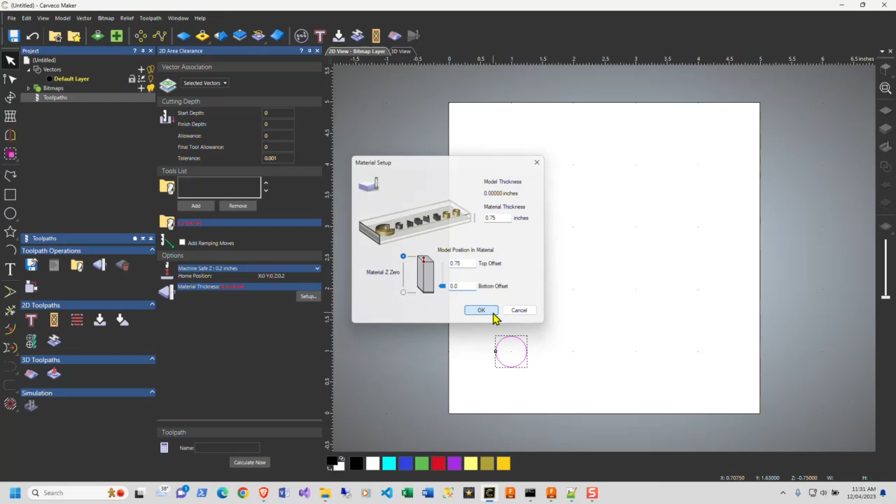Alright, so just keep that there. It'll tell you your thickness is 0.75. I think this should give us more information. There it is. So Z bottom is minus 0.75 and the Z top is 0, which seems to be a little backwards than this, but we'll go with it.

So when you Z off at the top of the material here, this is going to be X, Y, and Z 0. So keep that in mind: at this point right here at the top of the material is X0, Y0, and Z0. Forget about what all these numbers are above the cursor, but that's what it is, and that's what this is trying to tell you. All right, so let's go back to 2D view.

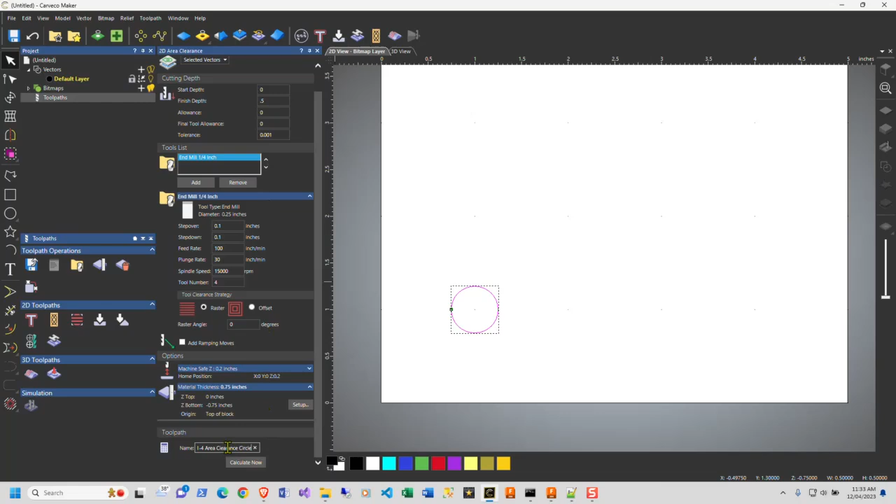So we're going to add a bit. The bit I'm using is a 1/4 inch. It's my tool number 4. If you need to set a tool number, you can go to Edit, hit Select, and we're only going to go down 0.5 inches, because I don't want to bore all the way through the thing. We're going to make this a 1/4 area clearance for my circle. And then you're going to see the toolpath get created.

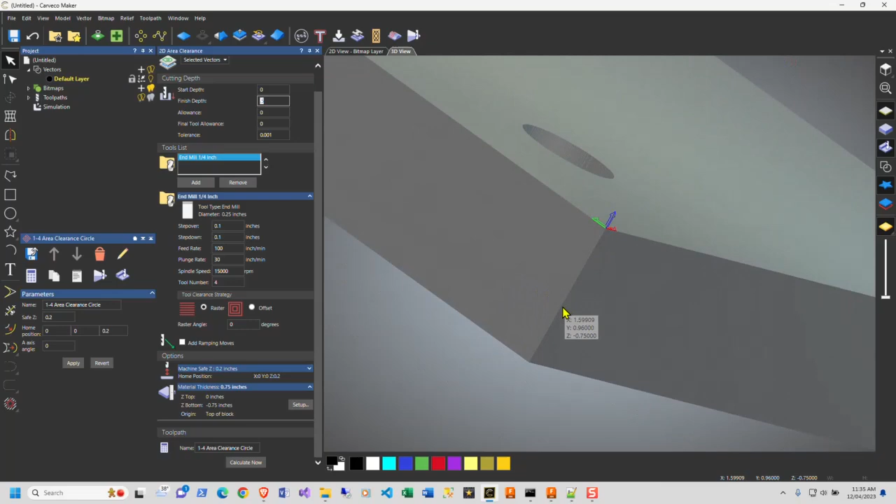Okay, so now you can see that we have a toolpath, and if we execute this, you will see that it is not completely through. We have a hole that is a 1/2 inch deep, and it does not go completely through because this is a 3/4 inch piece of material that I have here.

So what we're going to do is go out to the machine, and we're going to show you how to move this origin up to here and create another hole, or move the origin over here and create another hole over here. So you can do that on the machine without coming into here and actually moving the physical hole.

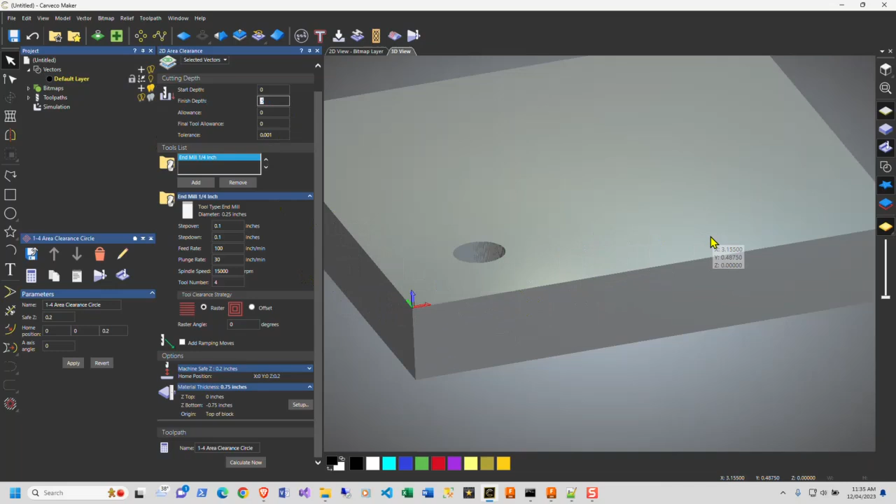This helps out a lot because a lot of times when these are created, you might have a bigger piece of stock, and you might want this hole to be closer to the edge of the stock. So moving this origin around will allow you to get your cut where you want it to be on that piece of material.

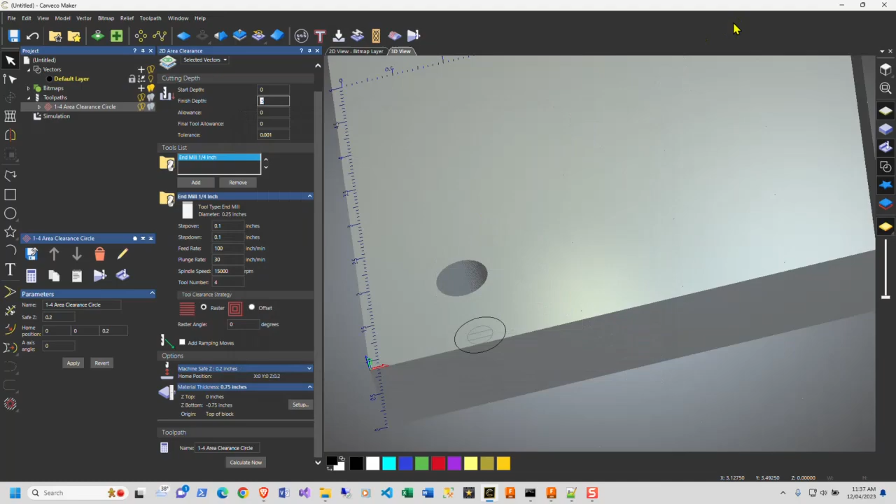So let's get this thing saved off now that we have it created. Area clearance, it's fine. And now it's saved. All right, so we can move out to the shop now and get this thing loaded up. So the G-code file is in this Lars Workshop Step 1 area clearance. It's what we just created. So it's going to get loaded, and as you can see, it looks like the bat signal here. It's just a circle out in the middle of the field.

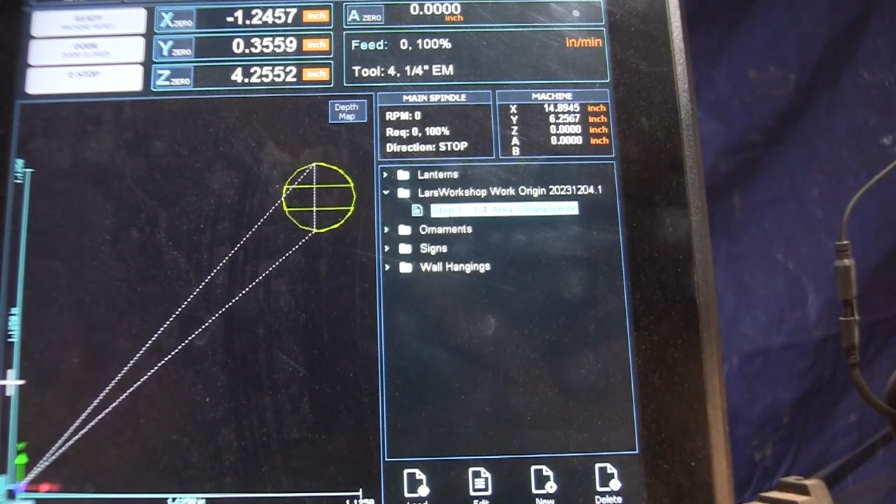So nothing major. If we pop over to jogging and probing, because we have to get this corner down here probed, which is 0, 0 for X and Y, and that is right there. So we're going to get this guy probed. We've got a whole video up on how to probe and I got another video on the errors you can get with probing and, well, Masso errors in general.

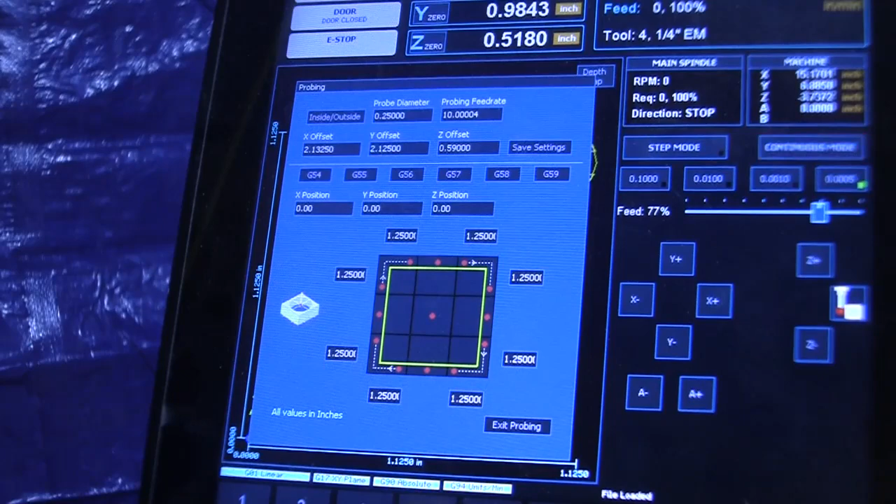Make sure you save your settings. You don't need to do this every single time. I'm just reminding you, you need to save settings before you actually do your probe if you change probe diameter. So if your bit changes.

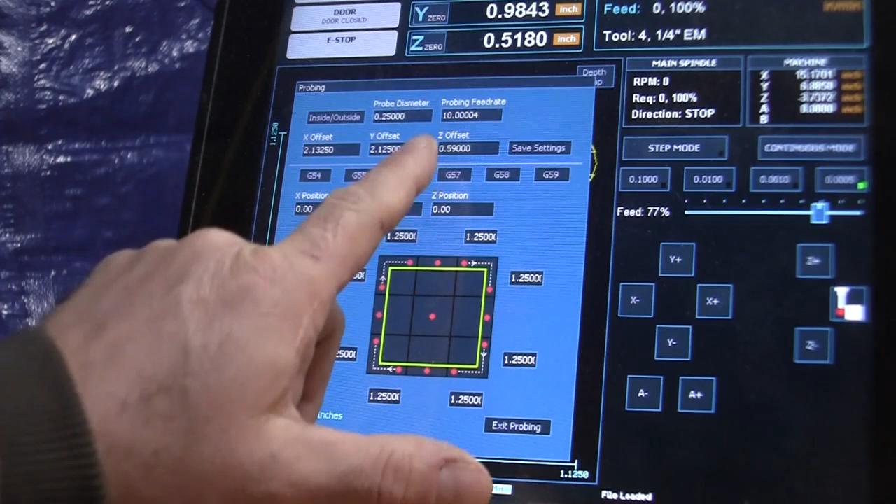So to do this probe, this is the actual probe block. We're going to touch this side, go over, and we're going to touch this side to pick up X and Y. And you'll see that happen right here. Just picked up X. And we picked up Y. I'm going to raise Z up.

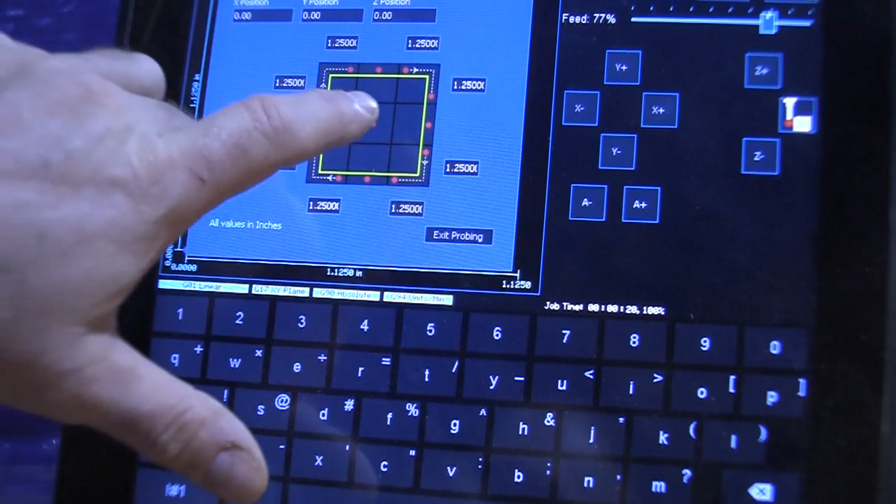Scoot that over top of the probe block. And then we hit the center button on here, that button right there, and this is what will happen. So you hit the center button, it lowers down, touches, the electrical current connects between this magnet and the block, and now we have our X, Y, and Z.

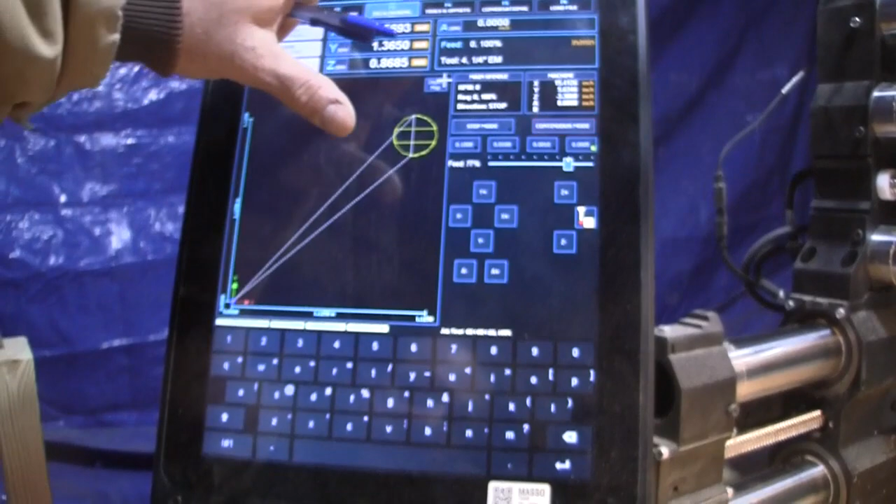We're going to go up to F4, Tools and Offsets, and then there is a G54. Now I've double clicked on this and named this Work Origin. Highly recommend you doing that, so when you come back here you know what you're looking at. This guy's Work Origin is 13.8 on the X, 4.26 on the Y, and negative 4.25 on the Z. That is what you just probed.

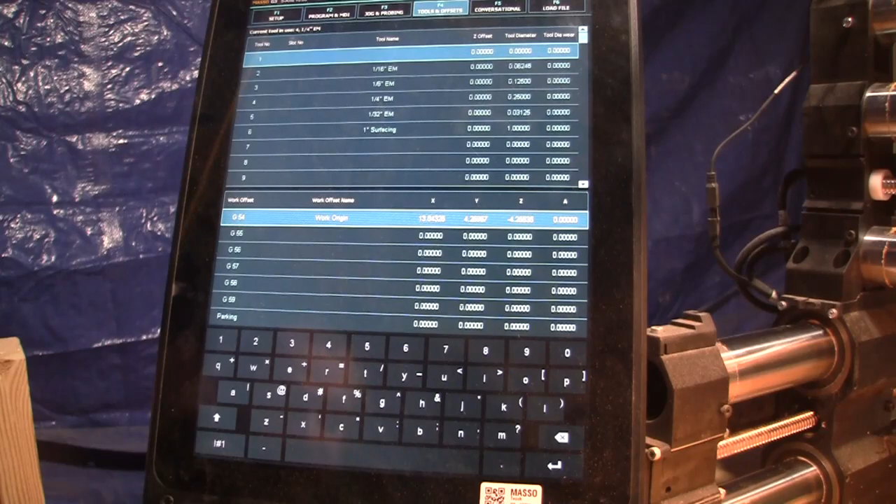So you just told the machine that my work origin is going to be residing at X at 13.8 from the machine's 0 and 4.26 on the Y from the machine's 0. Don't worry about the Z right now. We'll get into that later.

Okay, so if we go back to programming in MDI, you'll see the machine thinks it's at 15.4 and it's at 5.6. So let me zoom in on that so you guys can see this. This is where we're going to spend a lot of time in this video today. This area here is the machine's location. This area here is the job's location.

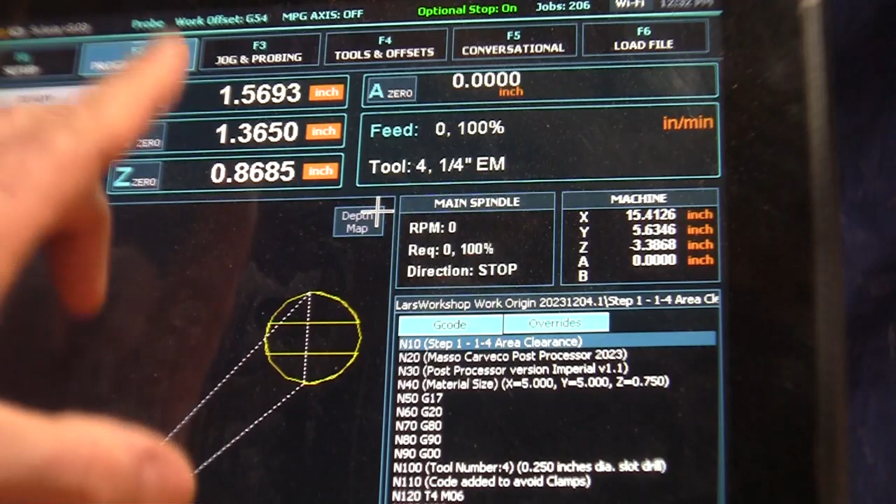In order to understand how this coordinate system for the machine and for your job works, because there's a relationship between them that everybody needs to understand to be able to do CNC programming and to be able to understand how to move a work origin offset, or deal with anything that's going on in your machine, there's 3 different points that we deal with.

This point here is the X and Y 0. This point here is the X and Y and Z 0, or the home of your machine. So when people are saying, hey, I had to home my machine because it didn't know where the point was, well, this is the reason. Because this is where your 0 is for your machine. 0, 0, 0 is right here, right where this tip is. All right.

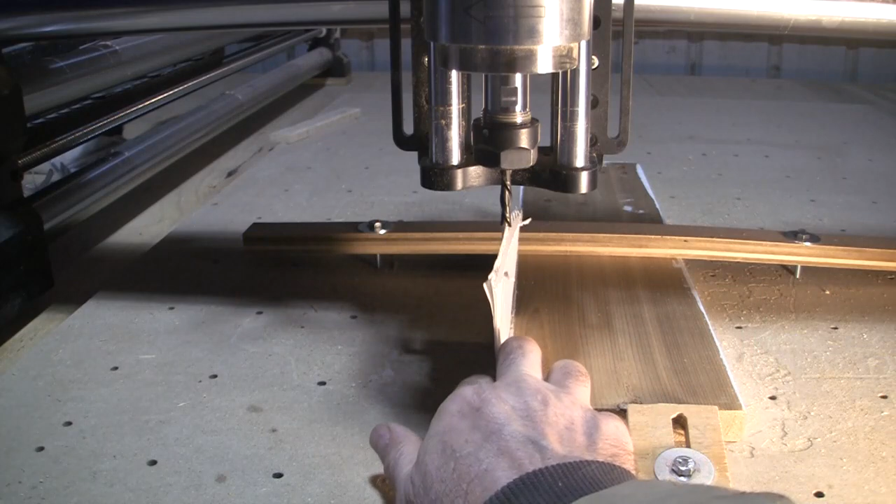Now the other point that we need to look at is the one that's over here, and it's the work origin for your job. Now this for your job is 0 on the X, 0 on the Y plane here. So if I take a piece of paper and I set this like this, and you take this plane all the way up, it's going to hit the center of the bit on this side. If I take this plane over here and bring it up, it's going to hit the center of the bit. So for X and Y, this bit is in the planes of X and Y.

All right. Now it's still in the plane for Z for the machine, because the plane for Z for your job is the top of this piece of wood. Now, in order for us to see this, let me bring this down. Now that bit is sitting on that top left corner of this piece of wood, right? Because that is the 0, 0, 0 for the job.

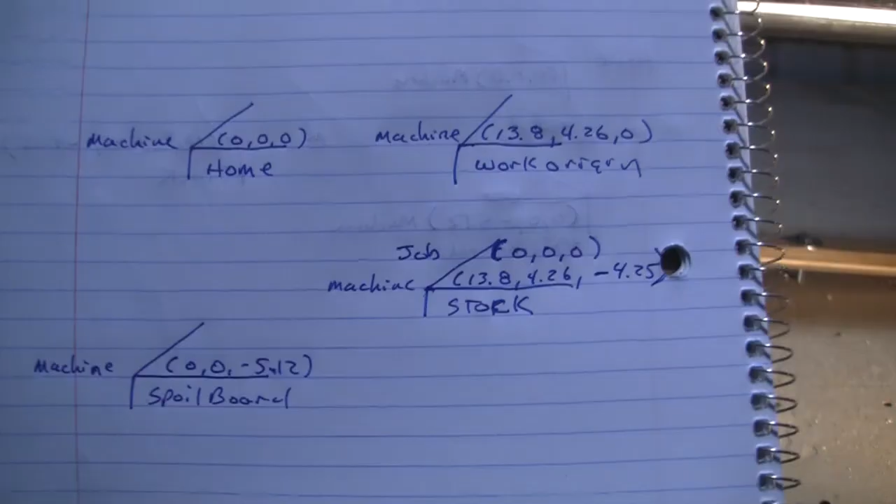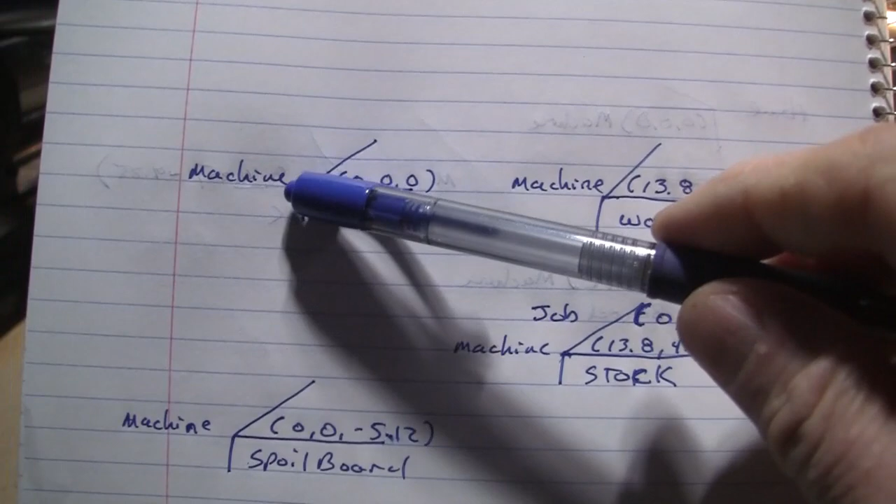So let's step back a second and think about this. Okay, so if we start from homing the machine, your machine's coordinates are going to be 0, 0, 0. All right. If you were to drop this bit down onto the spoil board on my machine, the coordinates would be 0, 0, negative 5.12, because the Z came down 5.12 inches.

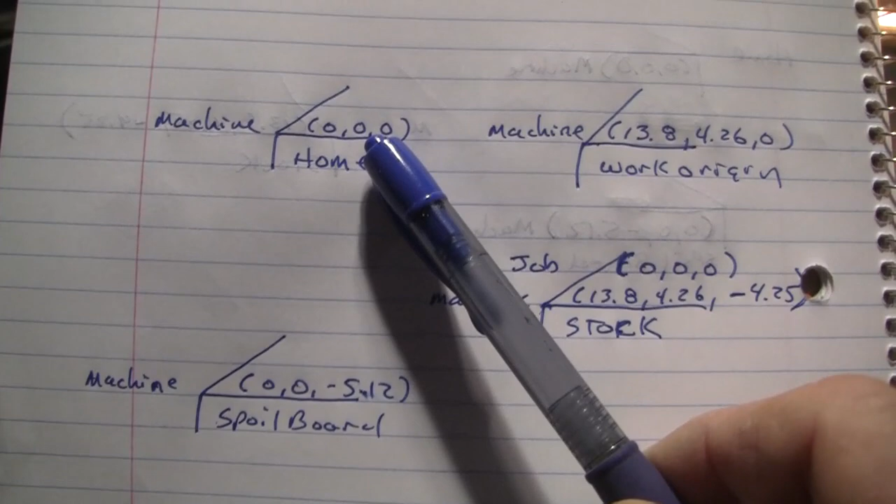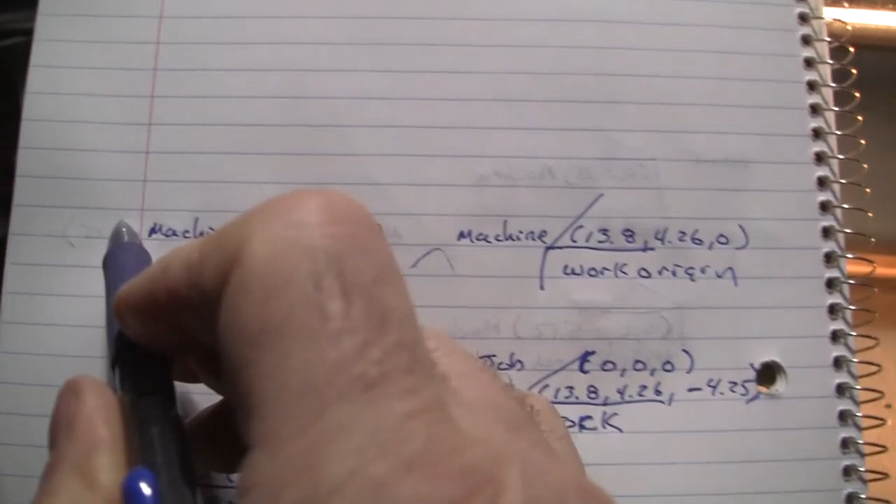So we go back up to the home, and if we were to hit work origin, it would zip over to this location, and it would be 13.8, 4.26, and 0 for the Z, because you're in the Z plane up here. This is the Z0 plane.

All right. Now, if we were to bring this down to the top of the stock, right, that top left corner where it's sitting right now, that location would be 13.8, 4.26, and negative 4.25, because we just came down from the Z level here.

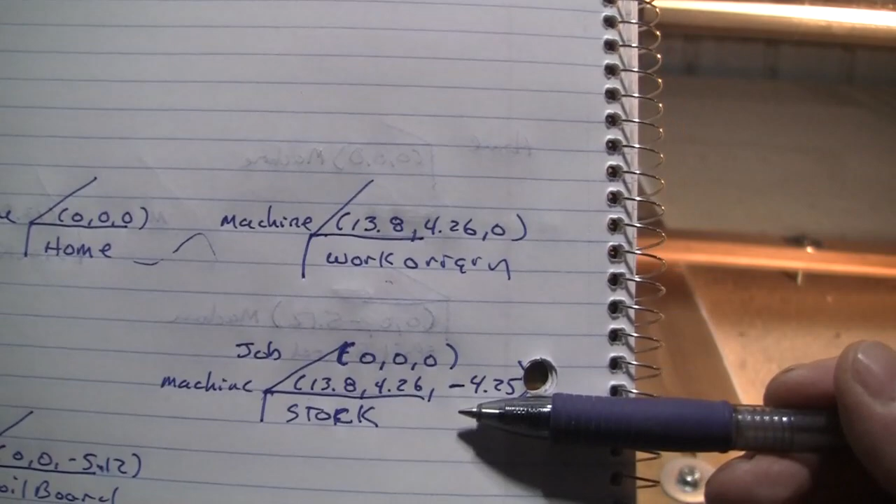But as far as the job's concerned, and this is what we're concerned about, it is 0, 0, 0 because this front piece of the wood is the X plane, its 0 is there, the Z 0 point is there, and the Y 0 point is there. So if you look at the pen, the tip of the pen, that's the center of the bit lined up. There's a gap in between here because that's the outside edge of the bit. Alright, so here's the outside edge of the bit.

You can see the gap. But the center of the bit, if I bring this up, you slide that under, you can see the center of the bit is lined up with that line on that 2x4. Okay, that bit of 2x4. Now if I pull this out, that's how far it is. So the center of the bit is actually on that little tip, that little point of that stock.

And it's the same thing going the other direction. If I was to go this way, you would see the same thing. So both the Y and the X is on that little tip. But we can change all this, alright? Now, the reason I'm setting this up is I want you to realize that this is the work origin for the project you're working on, not for the whole machine.

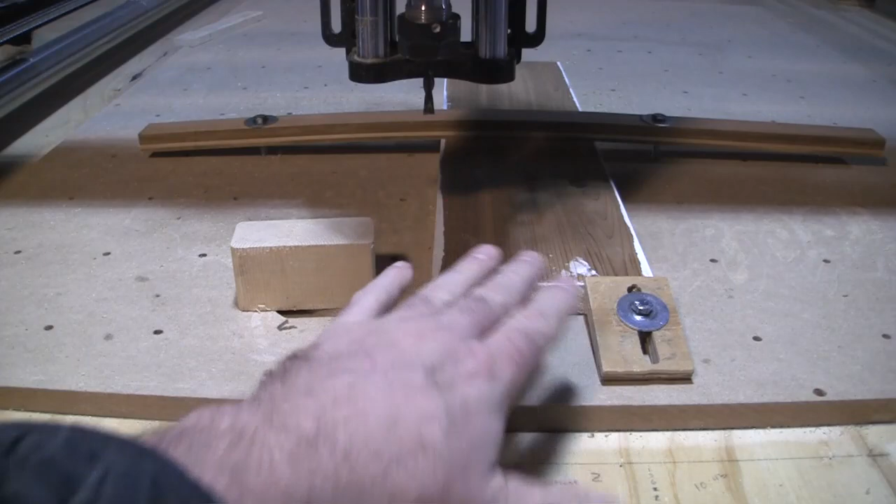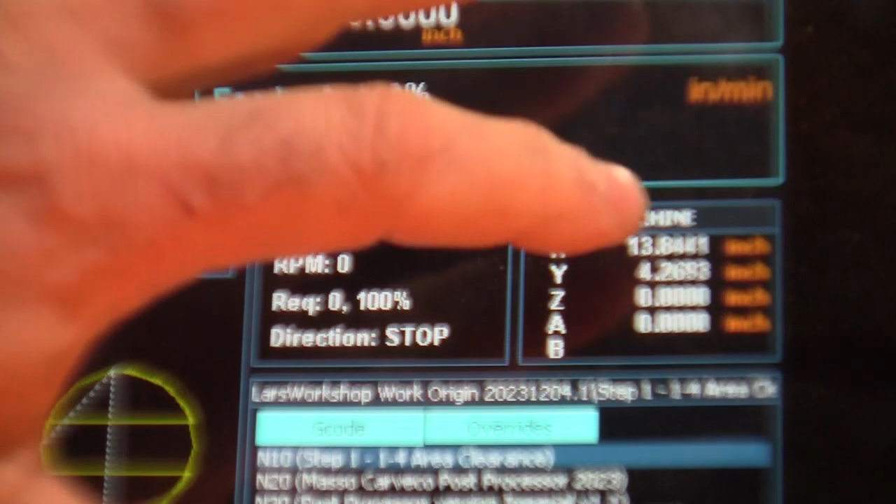So here on the screen in the machine area, these are machine coordinates, you can see that the work origin is X is at 13.8, Y is at 4.26, and Z is at 0 relative to the machine being homed. Alright, so a little recap on this.

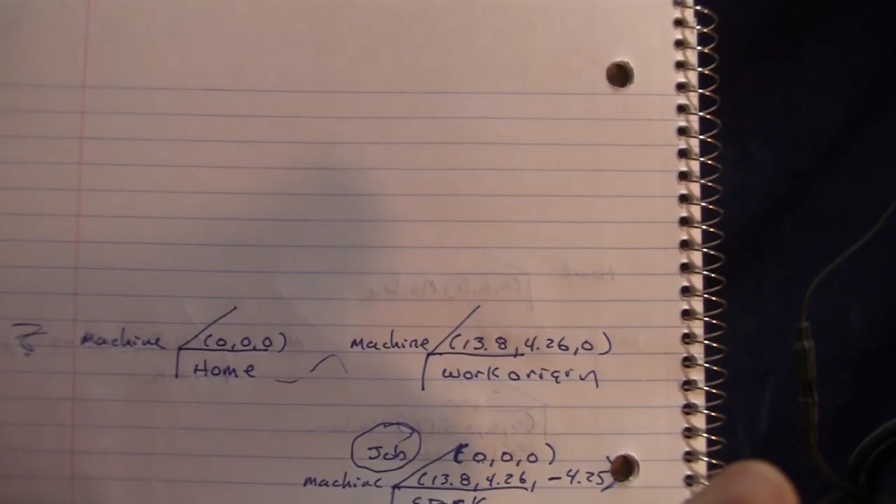So if your home is 0, 0, 0, that's up in the air in the front left hand corner of my machine, the machine for the work origin says 13.8 is the X, so we went 13.8 inches to the right, 4.26 to the back, and we haven't gone anywhere with the Z. Alright? And we can tell that by looking over here at the job.

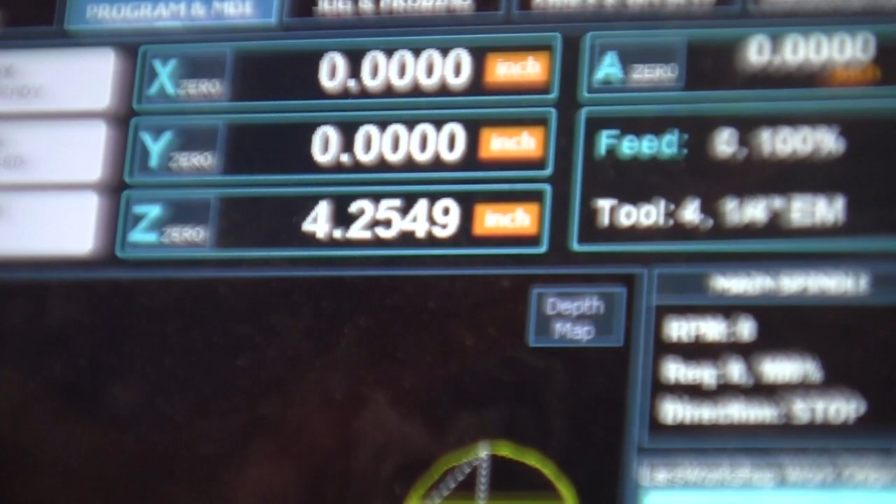So remember, X, Y, and Z is for your job itself. So here's the job right here, on the top corner of the stock is 0, 0, 0. So we are 4.25 inches above the job's origin of 0, 0, 0. Alright? So at this point, let's kick this thing off. We're going to get it running and we're going to cut a hole. And that hole is going to be exactly 1 inch to the right and 1 inch back.

Okay, so as you can tell, there's a hole that's 1 inch up and 1 inch from the left. And what we want to do is, without reloading a new program, without going back in, we just want to move this hole up another inch. Alright, so we're going to move this work offset. So how do we do that?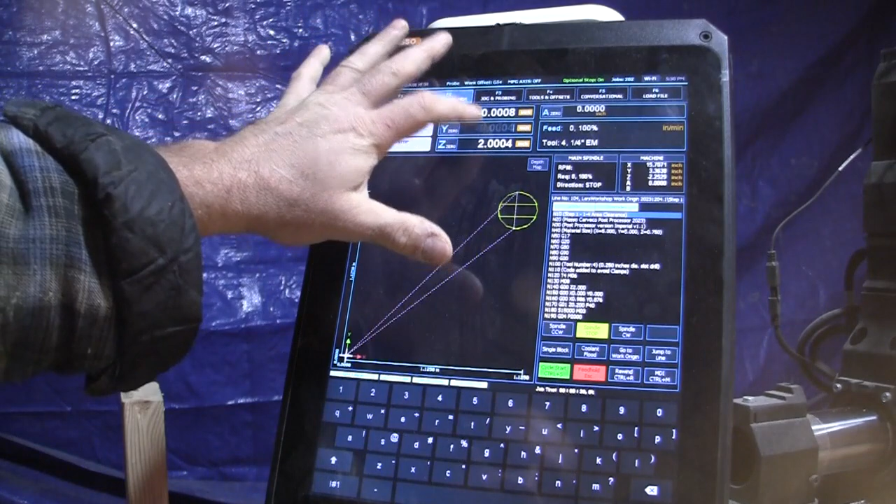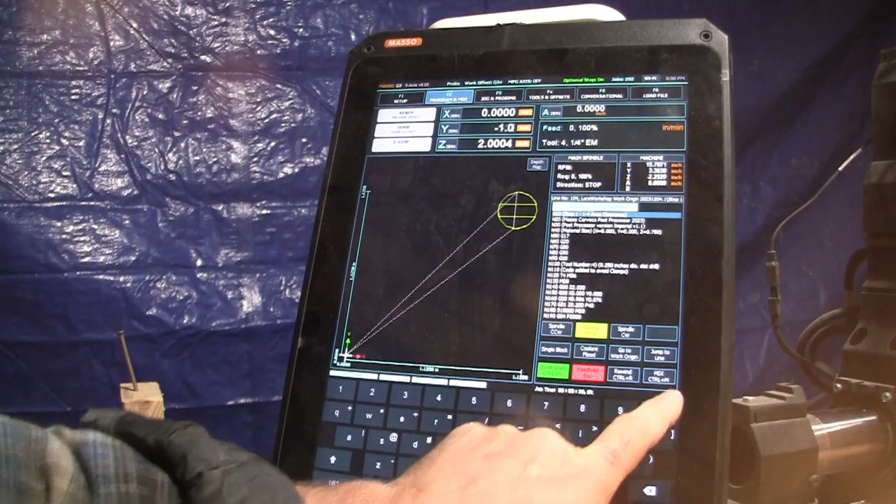If we go back to the console here, the Y, we're just going to zero this out. 0, 0 doesn't really matter. So if we take the 0 for the Y and we tell it that position is -1.0, we hit enter. Now watch what happens to the bit. I'm going to say go to work origin, and it just moved away from us.

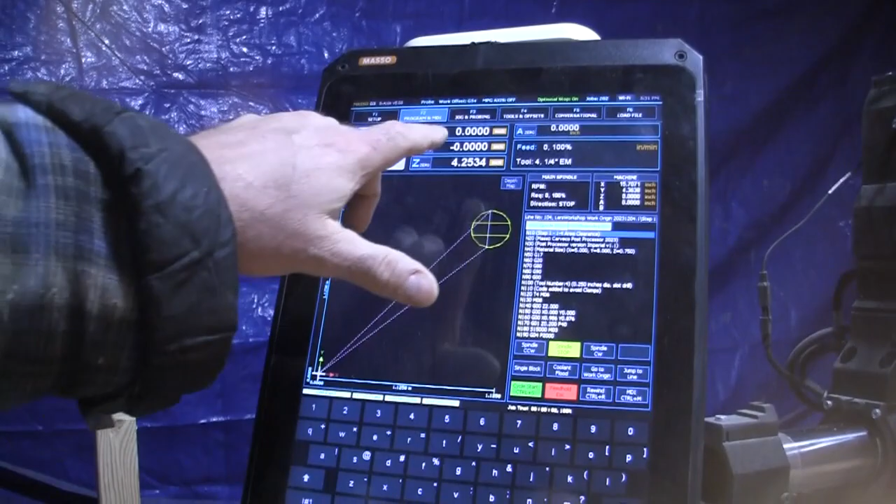Alright, I'm going to bring this down so you can see how far it moved. Okay, so we moved an inch back. So now this center is lined up with that. Let me do this again. Let me go back to work origin, because that's where it thinks work origin is, and as you can see, this guy thinks that we're at 0 up here. It says -0, but it still thinks we're at 0.

So let's say, nope, sorry, that was wrong. Let's make this 1.0 again. And now let's go to the work origin. So we're going to put it right back where it was. And you're going to see it's going to pull forward. All right? So that pulled forward. And now that says 0 up there.

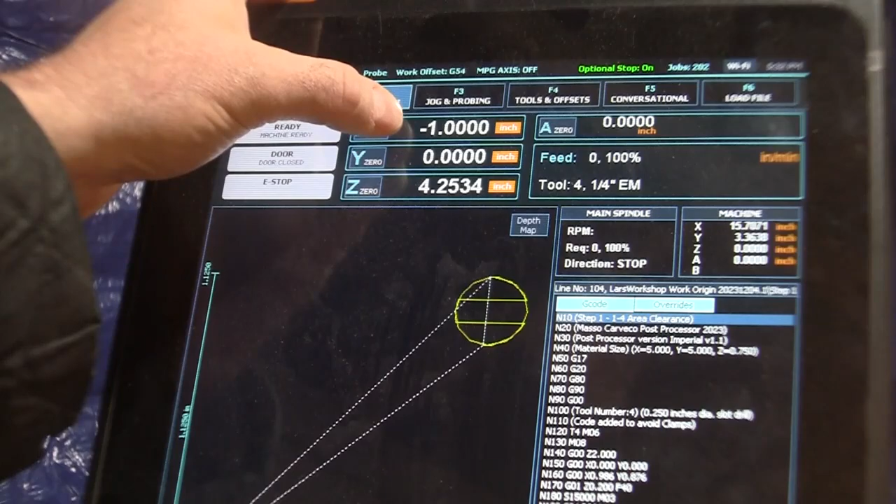So let's go to the right on the X. So let's take the X and say we are at -1.0. That's what we are telling the controller here, that the point that we're at is X is -1 and Y is 0. Let's just go with the 0 right now. Now I'm going to say go to work origin. Okay?

And it moved to the right. Now it's directly above that circle. Well, it's not directly above it. It's in front of it. It's right here, on this plane right here. The Y is on that plane. So if you wanted to get it right over the circle, you could put in here for the Y, say -1, hit enter, and then hit go to work origin, and watch what happens.

Now it moves back. If I go to jog and probing and bring this down, I'm going right in the center of that hole. All right, so that's what it takes to move the point around. So let's create another hole out there.

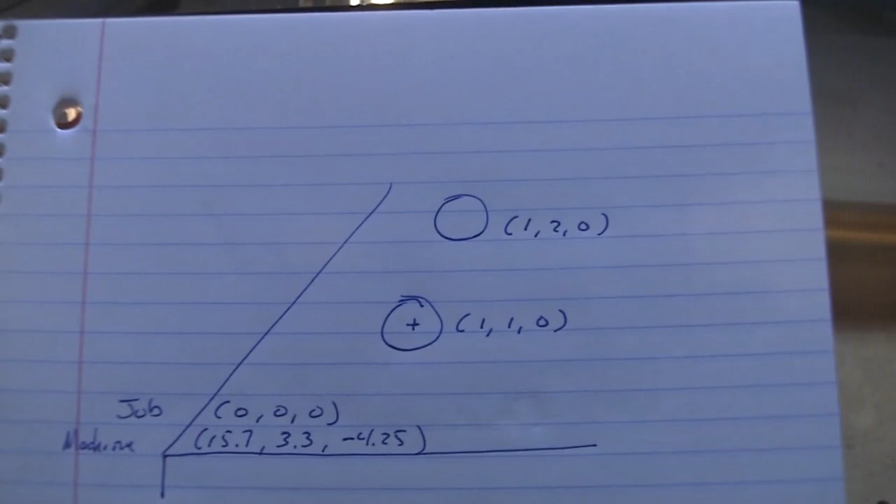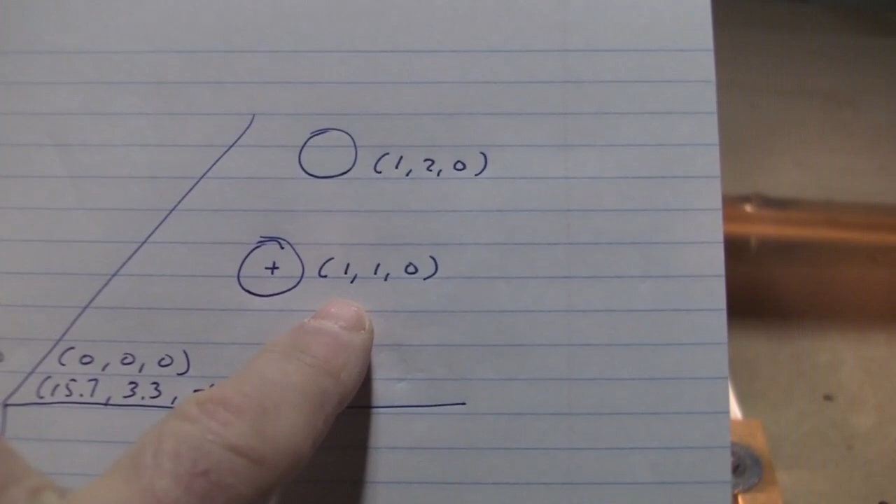In order for us to plan to move the offset, we need to know what we want to do. Say we just want to drill another hole back beyond here, 1 inch back. So that's what this is correlating to. We still have our offset currently sitting here for the job 0, 0, 0. This hole is at 1, 1, 0. So this hole we want to move back an inch, but still keep it in the same plane in the X frame here. So that's going to be 1, 2, 0 now.

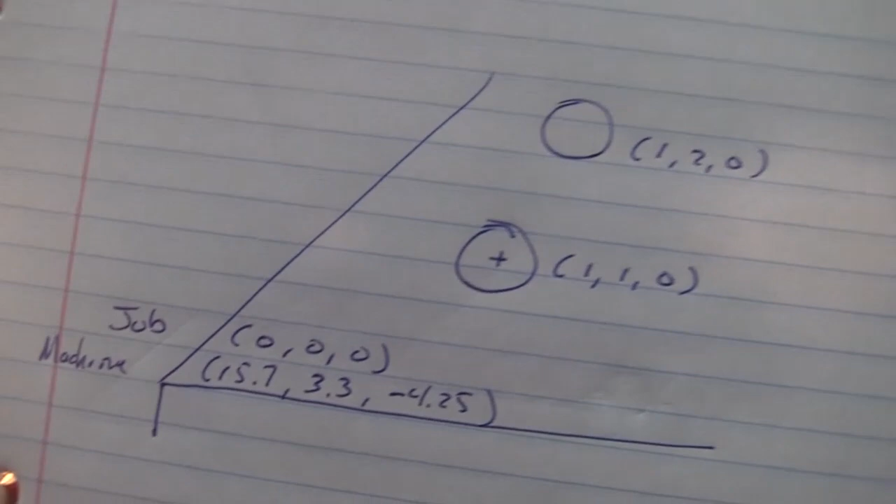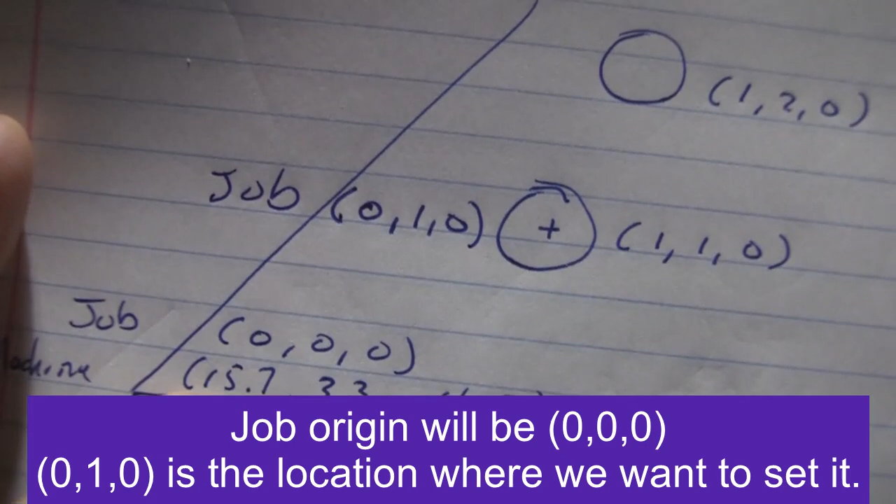So what we need to do is tell the computer that this job is no longer 0, 0, 0. We want this job now to be the job origin, 0, 1, 0, right here. We want this to be the job origin. Now in order to do that, you're going to tell the computer that this point is no longer a 0 here. This point is now -1. All right, and this will make sense in a second.

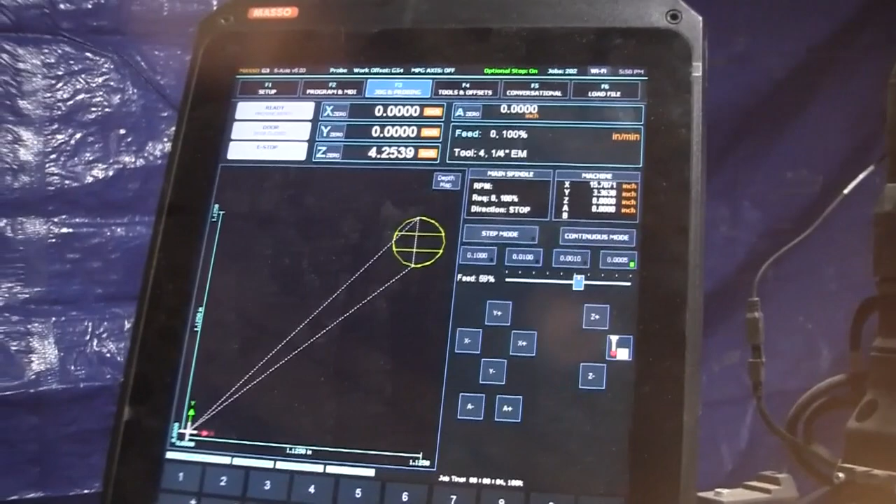So if you look up here, and we tell the computer this point is now -1, exactly where this is at. I'm going to drop down the Z like that. That point is X is 0, Y is -1, and Z is 0.

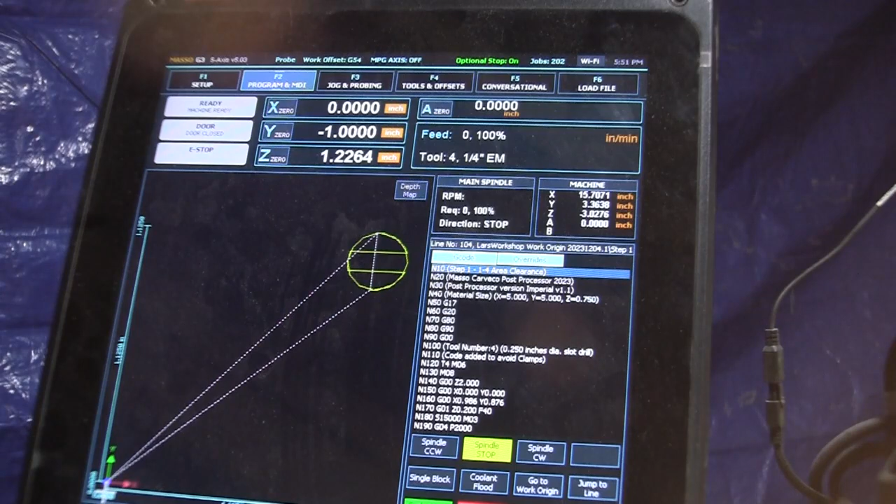So what's going to happen, I'm going to bring this up a little bit, when we come over here and hit go to work origin, it's going to want to take this number here and bring it to 0, 0, 4.25, whatever it is. So what's going to happen on this Y is that Y is going to become 4.3 because we're going to subtract this out. Now just watch what happens with the bit and we'll come back and talk about the numbers.

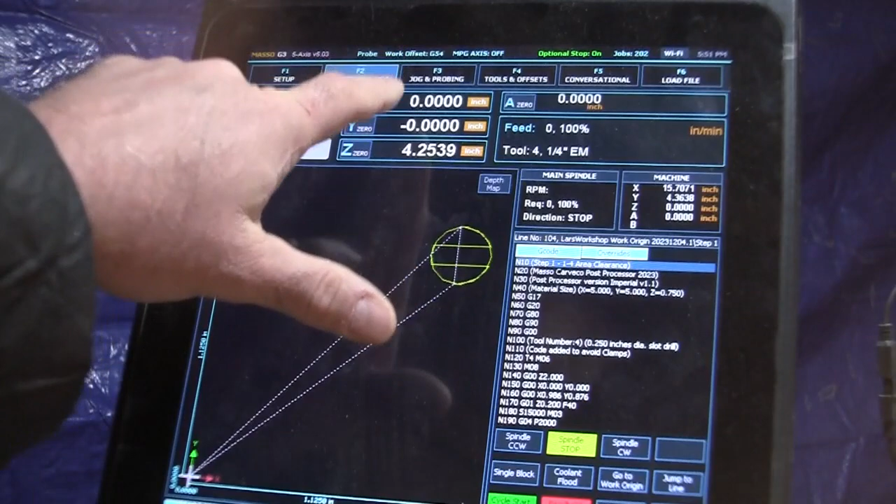Go to work origin, goes up, and it moved away. I'm going to bring the Z back down so you can see it, but here. First off, while we're sitting here, 0, 0, 4.25. Remember I said the Y would go to 4.36? And then watch where this is sitting now. This is now in line with that because we told it this was -1 on the Y.

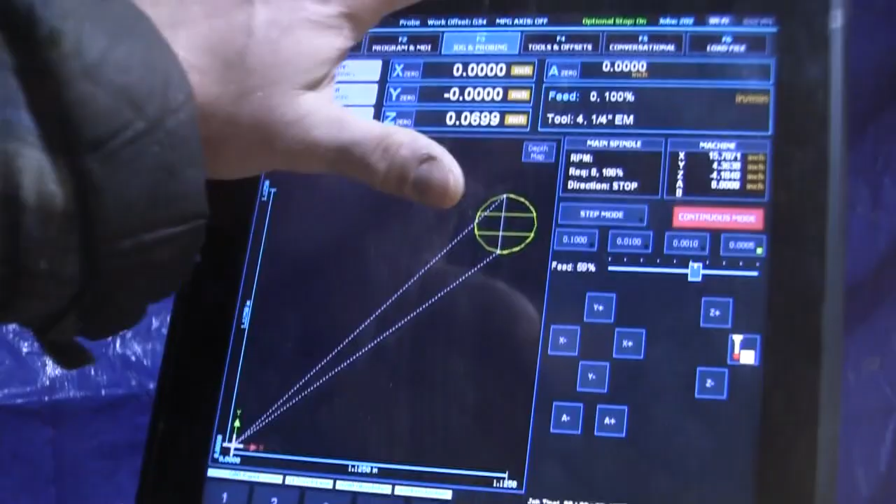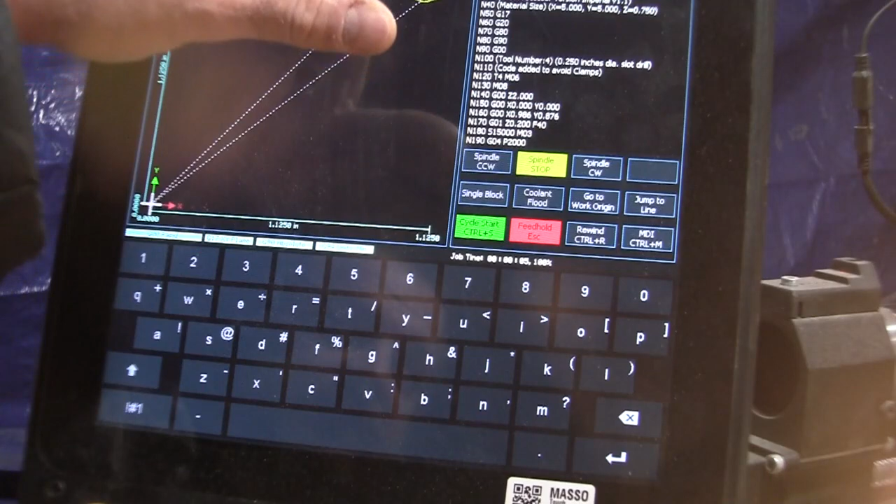When we went to origin, it said I need to go to 0. Now look at this. Tools and offset now says Y is 4.3 instead of 3.3, because that's what we basically told it to do. We didn't have to redo the origin. We just said this is -1, and now it's going to get back to 0, 0, so that gives us our 4.36. Now what's going to happen if we cut here?

Let's watch. I'm going to go to work origin, straight up. I'm going to rewind, hit cycle start, and look at that. We're going to drill a hole 1 inch away from us for the circle.

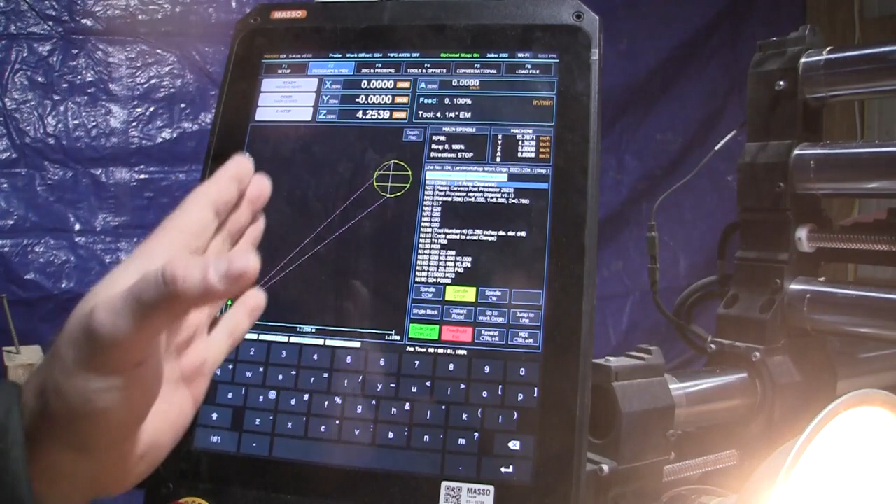Okay, so now we have 2 circles because we moved this back. So let's do this with the X now. All right, so let's just go back over here, and we're going to hit work origin. And this guy says 4.36. We need to put this back where it was before we can put another circle to the right of the original circle. Okay, so if we want to put another circle right here, we have to tell the computer that this guy here is at position 1.

Otherwise, if we move the X, we're going to put another circle up here. So let's just make this go to position 1. So we just go here and say, hey, you're at 1. And now I'm going to drop down the Y so you can see where it's at, or the Z. So you see how far back that is?

That's 1 inch back, and if you look at the computer, it says it's at 0, 1, 0, or close to 0. So now when I hit go to work origin, it's going to come up and it's going to come forward. So when we bring this back down, we're back at this point.

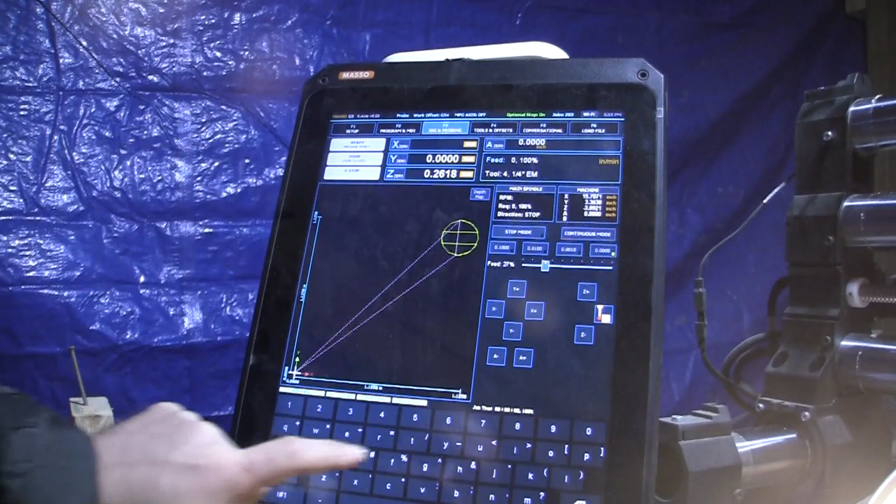Now we want to move this over and say we want this to be 1 inch over and put another hole in there. So I'm hoping you guys are kind of following along with this now. For the X, we say that position is -1, so that we're going to move the X over to the 0. So when we hit work origin now, it just moved over. It came up and moved over.

So let me show that to you again. If we bring us back over this way, and we just hit work origin. Now I bring back down the probing, and we're going to be in line with those circles again. Okay? So let's kick this guy off and you'll see what happens with it. Go to work origin, hit rewind, cycle start. And we're going to put a hole 1 inch away. Same program. This is all the same program.

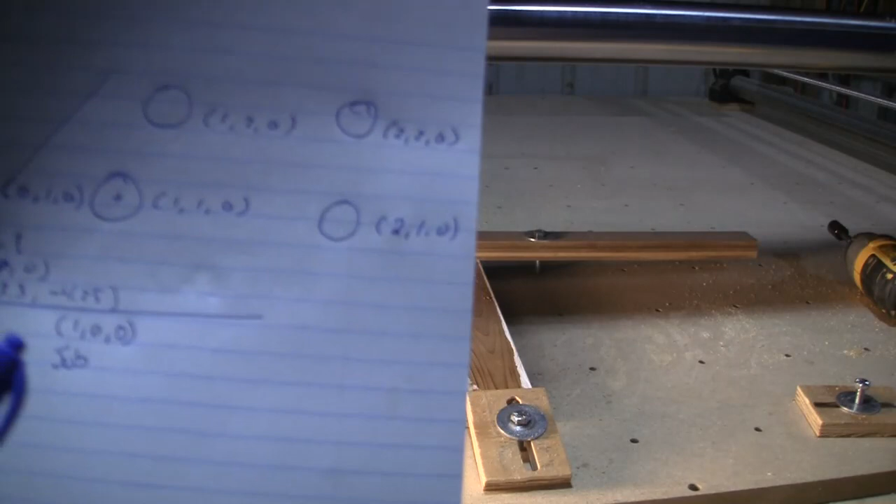Okay, so what we have now is we have a hole here at 210 because we said the work origin, or the job, is at 100. So now let's put another hole up here at the top. I should let you guys do this yourselves, but we need to put our job origin right there on 110. And that will give us a hole at 220. All right, so let's try that.

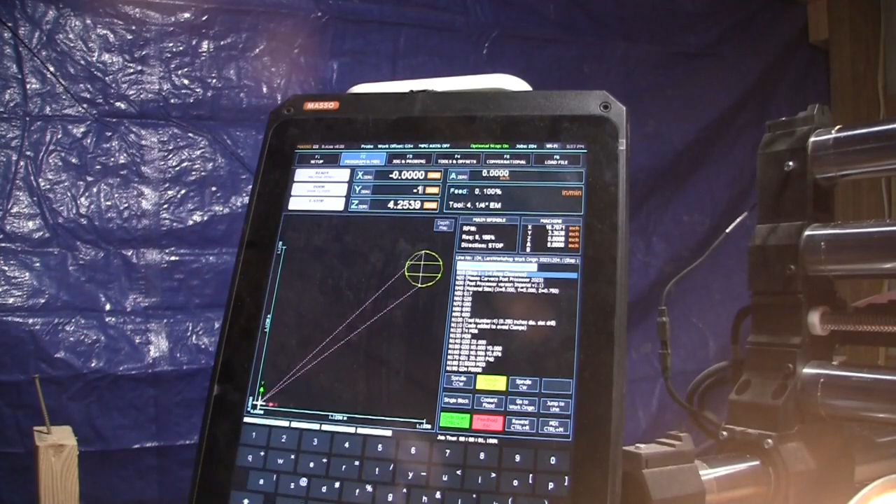Since we've already got the work origins already off for the X, we've already added to that. So let's just tell it that the Y is at -1 now. All right, now go to work origin. And now we've got the 16.0 and the 4.3. Let's hit rewind and let this thing start. Now let's see what happens.

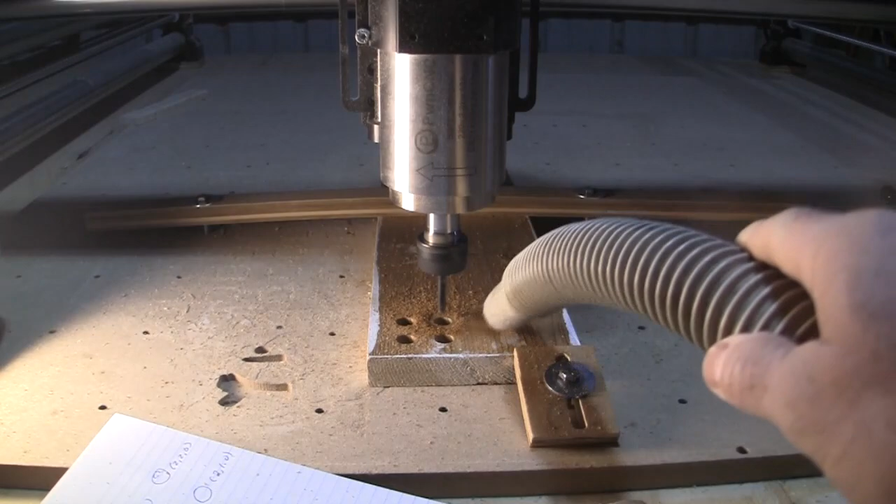Some of you may be asking, why, how important is this? How, what would I ever use this for? One of the things is just doing some tests on some holes and stuff. As you can see, I don't have to go back inside and edit things. I don't have to move my diagram over to get 4 different holes. I can just go in and adjust the depth that I'm cutting my holes in Carveco or Fusion 360 or whatever. I can just say, okay, I want this depth to be a little bigger, a little deeper, or bigger in size or whatever, and I can use more of the board for testing.

Second thing you can use it for is if you ever have to add an extended board out here. Say you're making a ruler or a height chart that's 6 foot tall or 7 foot tall, if you have a kid that's going to be really tall, if you think they are. So you can cut out the first 3 feet, bring that down, find out where that 3 foot mark is. If you're putting in your 4 foot and it's going to be a foot away, which is fine on something like that, right? Then you can continue it a foot out. You can use this X and Y to adjust so you can keep your line straight and how far away it is. So play around with it before you go and cut something real, but play around with it, get it down so you can say, okay, I did print something 4 foot, now measure it out and go, oh wow, look, this actually worked.

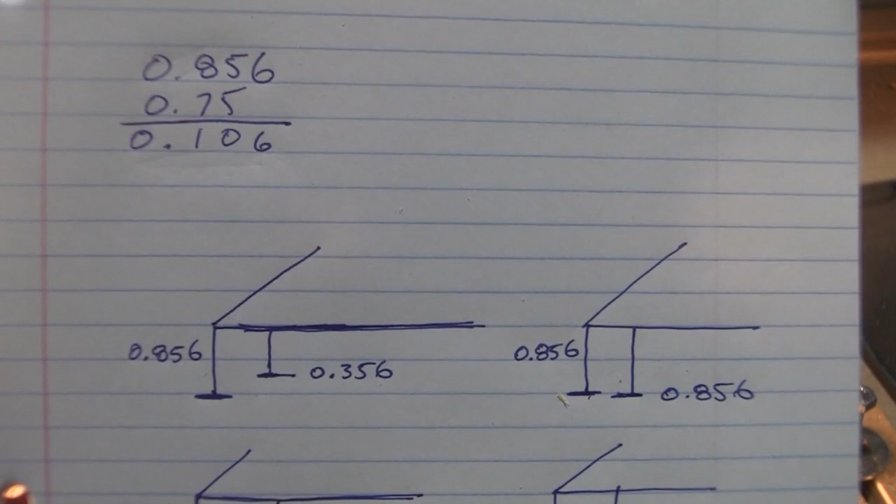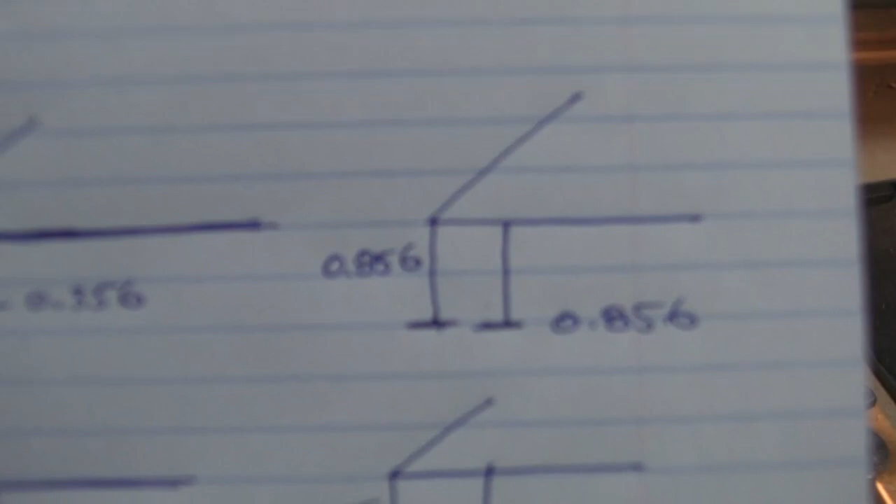And we want to go down to, say you're cutting out some lantern faces and you have a variety of different thicknesses of wood. I'm just going to pick that there's 2 different thicknesses. One is 0.856, which is kind of thick for a lantern face, but the other one say is 0.75. So right now, if you're cutting completely through, say these circles, these holes were going all the way down through the wood, right? So here is the 0.856. This would cut down to the bottom and everything would be fine, right? Your spoil board pretty much hits the bottom of it. You might have some burrs that come out and whatnot, but it's not going to be that big of a deal. If you were to cut this with, let's go over this side.

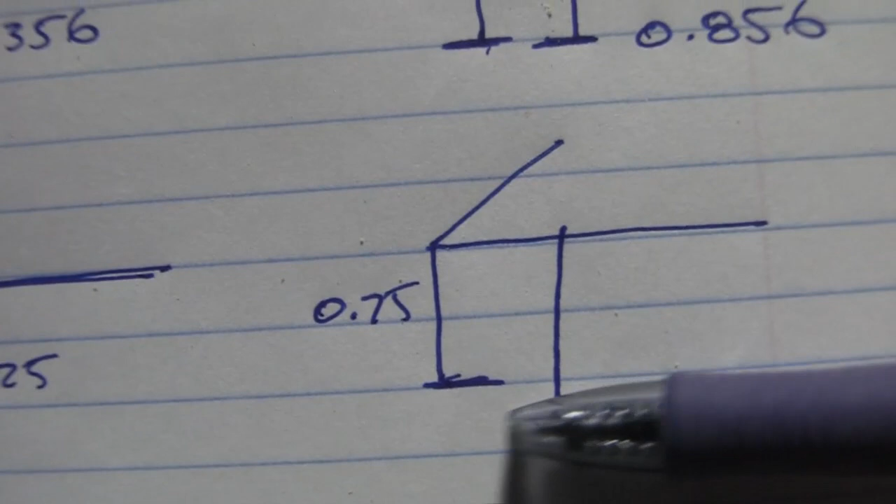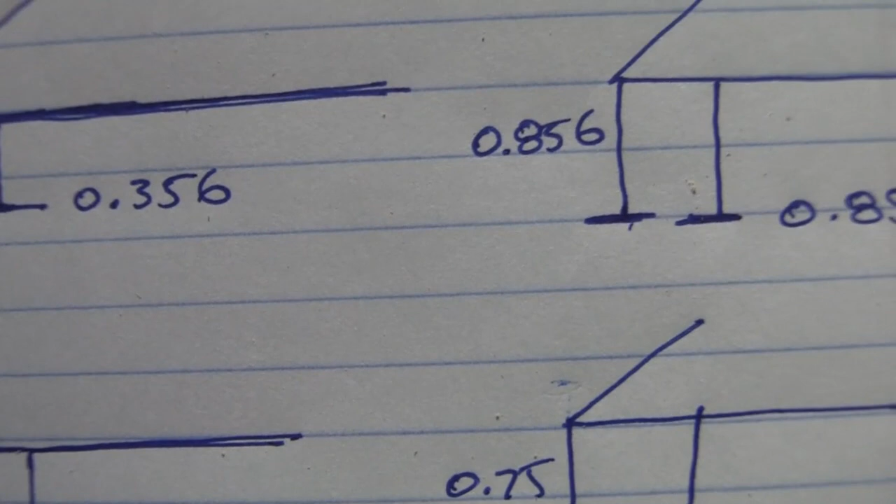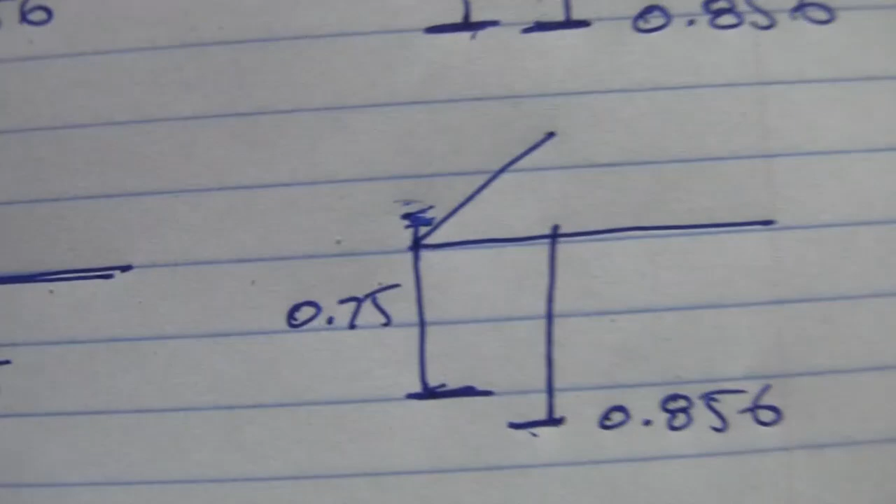If you were to cut through this with the 0.75 and your program still said go down 0.856, you're going to bury yourself into your spoil board, right? Okay, so what we need to do is tell the controller that your piece of wood is actually thicker than this once you probe off on it. That is, you're basically telling it that your bit is longer than it is, if you will, but you're going to run it shorter. So the difference between 0.75 and 0.856 is 0.106. So we need to tell the controller that your piece of wood is 0.106 thicker. Otherwise, what you need to do is go back into your Carveco or your Fusion 360 or V-Carve or whatever and tell it to regenerate all your tool paths.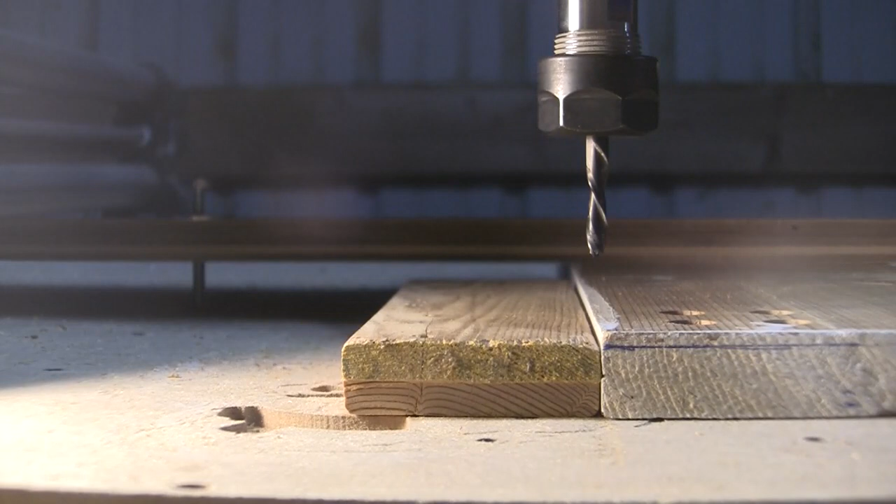And not everybody wants to do that. Now, the Z-axis is no different than the X and Y-axis. Say you're cutting out a bunch of lanterns, faces on lanterns, and your wood has different heights, different thicknesses.

You can either go through and plane down every piece of wood to have them all the same thickness, and that would be great. But some people like them a little rough. Some people like the way the cedar is. They don't want it really smooth like this. They want a little bit of a rustic look on it.

So you're going to have pieces of cedar that are this thick and some that are this thick. So if you start out with a piece of wood that's really thick or really thin, no matter which one you do, you can't really use the same program to cut these out.

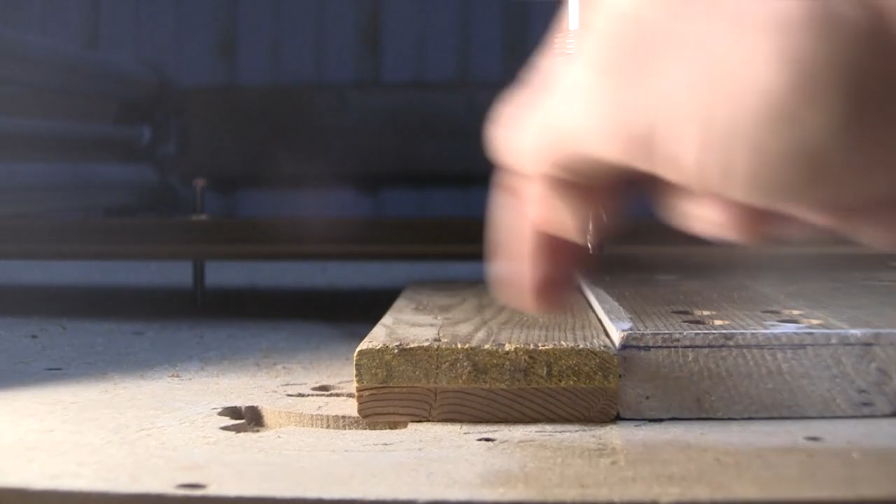Because if I'm cutting completely through this piece of wood, and say it's 3/4 of an inch, say this is 0.75, and I cut completely through this. Then I come over here and probe my Z up on top of this, and come down and cut through 0.75, I'm going to end up stopping right about here, and I'm not going to cut completely through that piece of wood.

That causes you a lot more work. So likewise, if you were to do the same thing over here, and say this is a 0.856 thickness piece of wood, and we went through and cut this completely through right down to the top of the spoil board, and then we switched out to this and ran the same program, I would literally bury myself into that spoil board, this thickness right here.

So the way you can repair this is you've got to figure out the very first board that you measured off and what your program tells you how thick the wood is, and make sure you keep notes of this stuff, like put a readme file with it or whatever, something to tell you how thick the piece of wood was. A lot of programs will kick out that information for you.

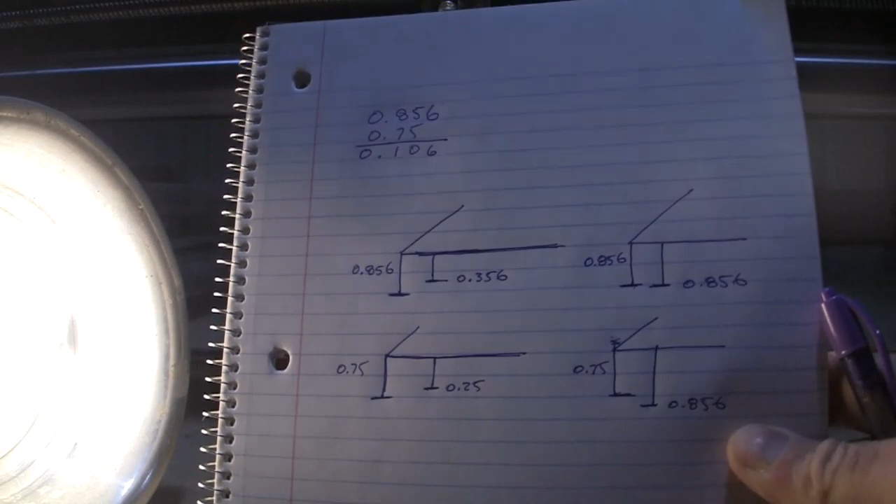You can do that if they're correct. So say the very first board you cut was 0.856, okay? That one's going to level down and you're going to be good.

Now you've got to pull that piece of wood out, put a new piece of wood in, and the first thing everybody wants to do is probe on X, Y, and Z. The second you do, if that board is smaller and you probe that Z, you're going to bury yourself into your spoil board. Now, you don't really have a choice if you have to keep switching bits.

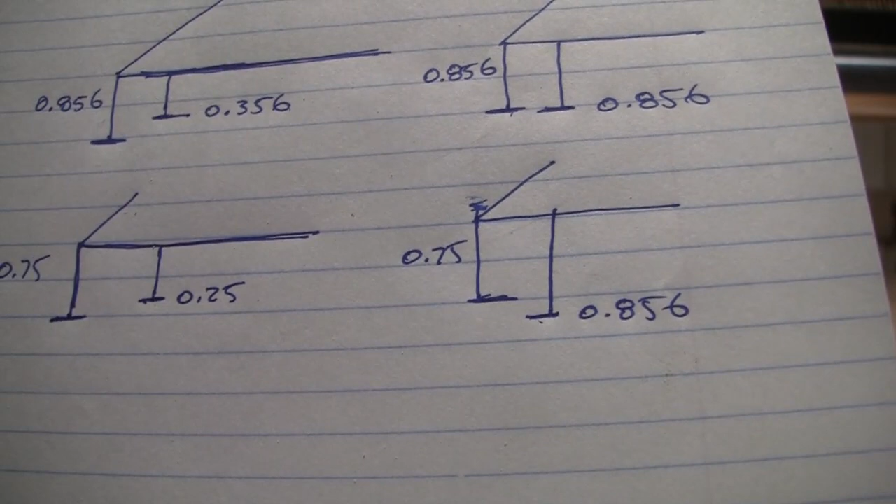If you go from a 1/4 inch to an 1/8 inch, a 1/4 inch, an 1/8 inch, a lot of us do that. There's a lot of details in these lanterns that I do. So you're going to cut out the 1/4 inch stuff, then switch to the 1/8 inch, and you've got to go back to the 1/4 inch. But you're working with a 0.75 piece of wood here when you went from the 1/4 inch to the 1/8 inch up here.

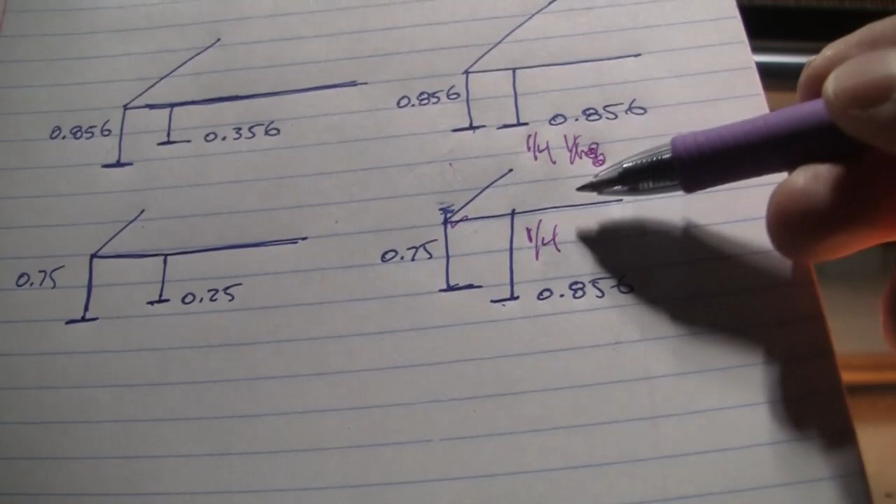I'll draw that 1/8 eventually. And then you're going to put the 1/4 inch back here, but you're going to have to zero that off on the 0.75 because you just switched out the 1/8 inch bit.

So here's the simulation for you: we've got this piece of wood that we're now pulling out. We've already finished off this piece of wood, we're good with it, we've got our nice little lantern on that, and we're putting this new piece of wood in. So let's get this guy clamped down.

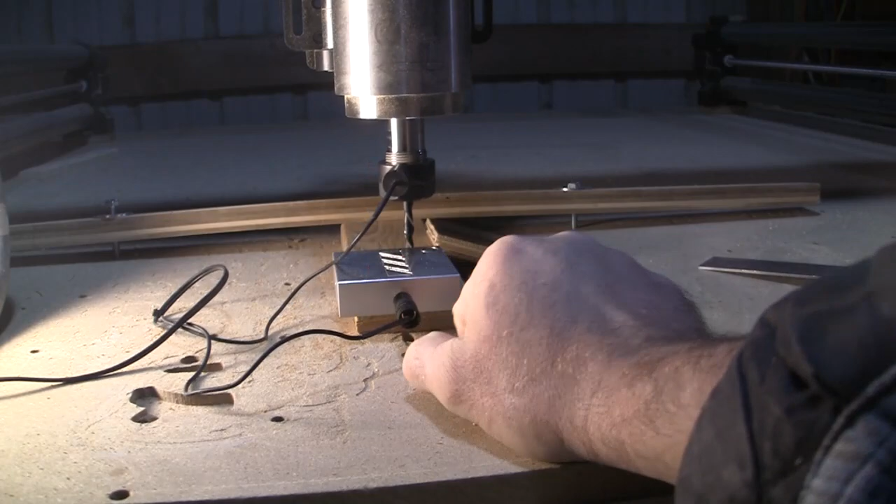Okay, so that's what everybody does, and the next thing you're going to have to do is come over here and go to probe the Z. You touch. Now, this is where the problem lies, because this piece of wood here is obviously thicker. And if I'm using this piece of wood's measurements for cutting a board all the way through, I'm definitely going into my spoil board. If I'm not, it's not a big deal.

If I'm going down, say we're only cutting holes in this a 1/4 inch, yeah, cut a 1/4 inch all you want. I'm more worried about the spoil board. So what we need to do is take the difference. I know that this is 3/4 and that this is 0.856. So the difference is 0.106, and here's the math that I did: 0.856 minus 3/4 is 0.106.

So I need to add to this Z point 0.106. Otherwise, when I run the program, I'm going to bore all the way through this thing, and I don't want to do that. So let's figure out how to put this math in here. All right. I've brought this as far down to the board as I can without actually hitting the board. Now I'm going to do some math on the controller.

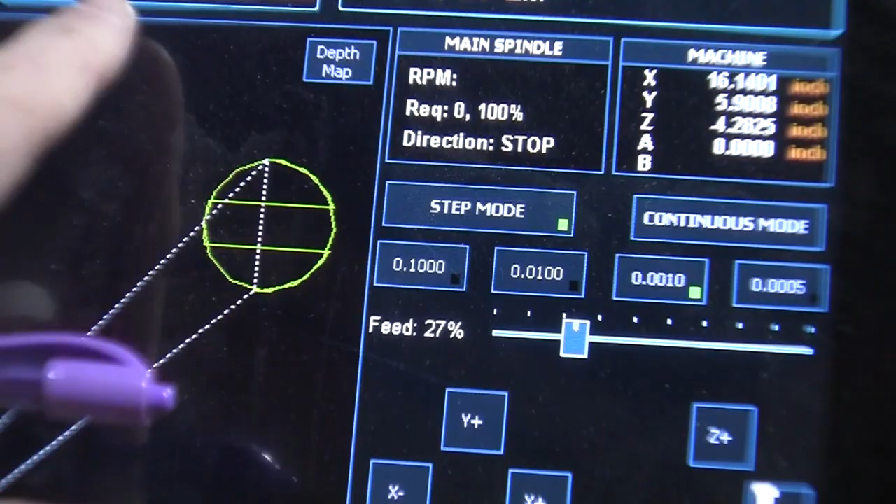It's not like the controller is going to actually do math, but we need to get to the jog and probing page right here, get into step mode, and get this number at the top here to be 0 or as close to 0 as we can. It's 0.07, so this is 0.01, we're going to choose that, and keep going down until we get that as close to 0 as we can.

Like that. That's pretty much as close as you can go, because you can only go to 0.001 and 0.0005, and when you hit that, you're going to be negative 0.6 for some reason. I don't know how that becomes negative 0.6. So we're just going to zero that out. Now at this point, we need to tell the machine that this is negative 0.106 and hit enter. Now I'm going to drag this up a little bit.

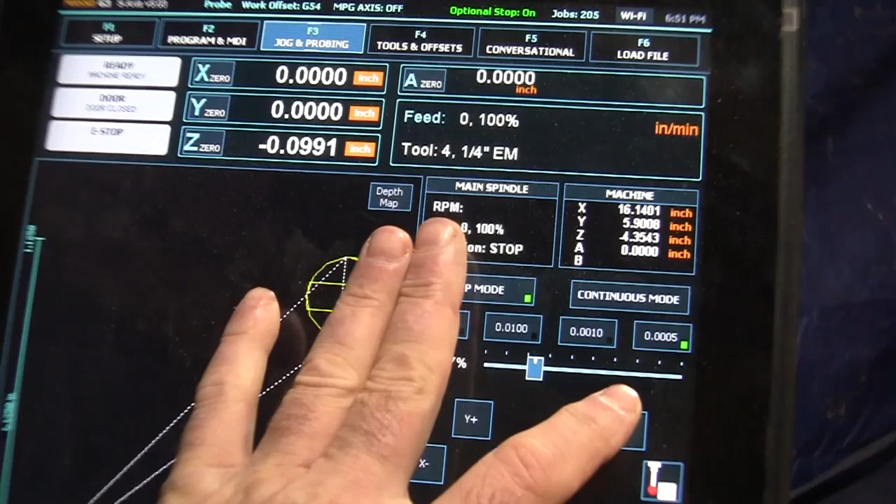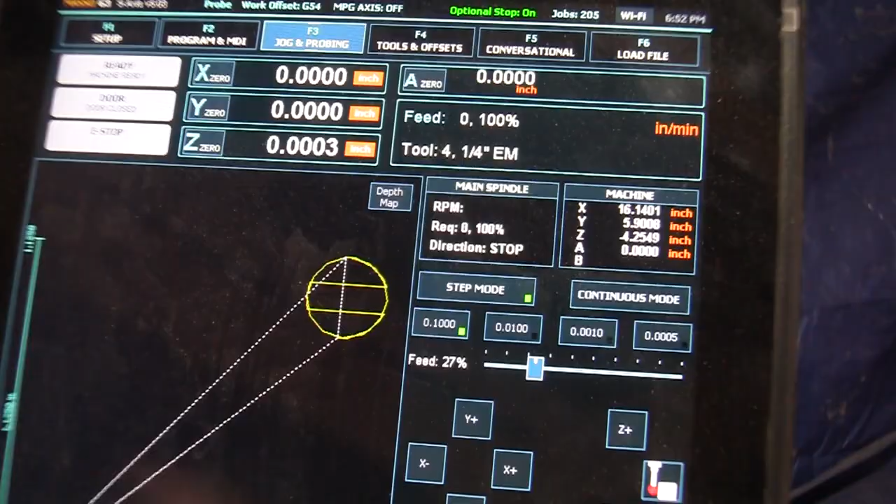Let's go to here, and then we can bring this up 1 like that. Now if you take a look at this bit, I'm going to take the old board and set it in here, and this old board can fit underneath the bit now, and that's what we want. We want this to think that this board here is still the thickness in here.

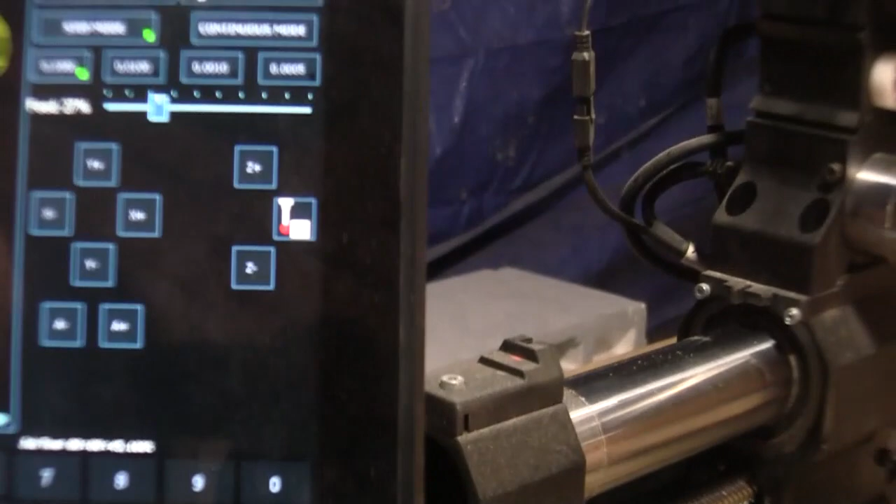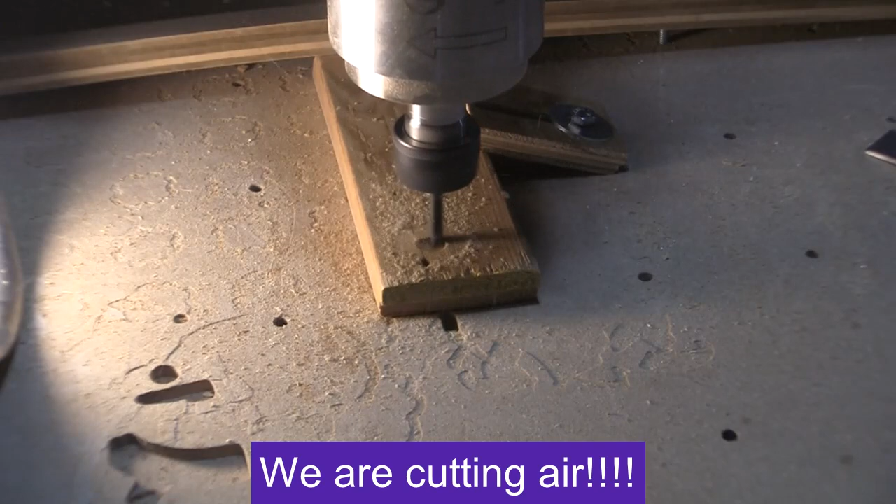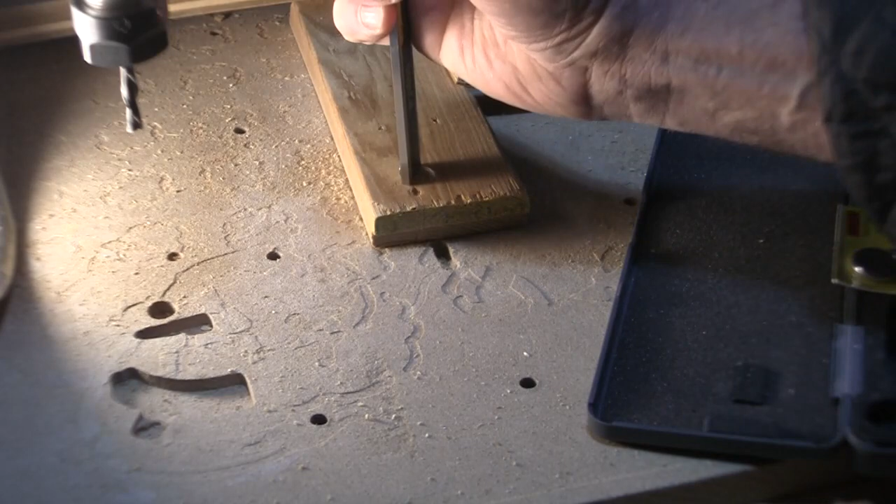So I hope all that makes sense. Hopefully you understand more about the work origin and work offsets and how the probing works and puts everything in G54.